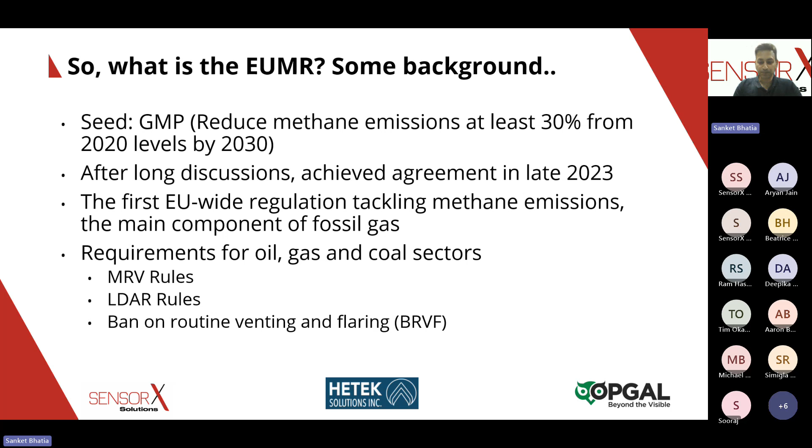And then there's one more part which basically bans routine venting and flaring of natural gas or any gas that contains methane in a high quantity. So there's that part as well. All right, so yeah, that was the background, how it started.

To take this topic away, of course, if you have a regulation like this at such a large scale, you can never make everybody happy. So yeah, there is of course some justified and maybe some unjustified criticism of the regulation as well.

Just a few points here. There is no implication for imported energy sources. Europe itself doesn't have much upstream sources, so there's not a lot of gas being mined here. Europe relies a lot on imported gas, and there is no implication for imported gas yet.

So this is kind of foreseen in the regulation, and this is already now a big topic with Trump and the US, where there's a big pushback. But yeah, this is not something covered in the regulation today. There is no timeline to implement a maximum methane leakage rate, so there is no ceiling defined so far, which brings me back to the point I mentioned earlier. There's no real connection to how much reduction we are hoping to achieve through this complicated regulation.

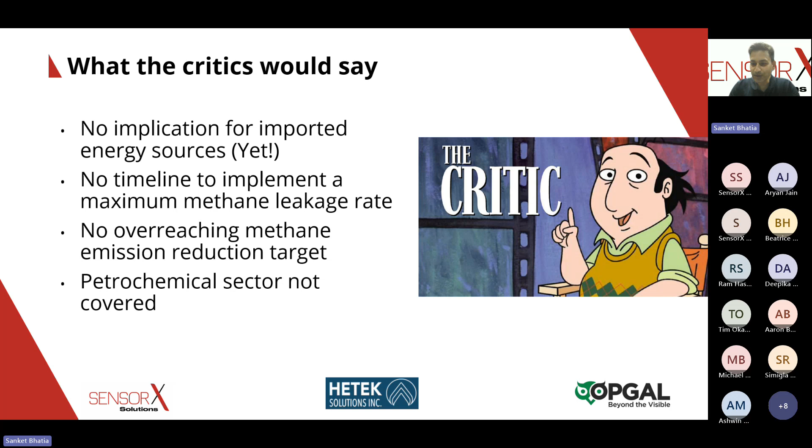So that's the third point as well, no overreaching methane emission reduction target. And then one big sector which is not covered is the petrochemical sector, so really the oil and fossil fuel sector, other than the natural gas part of it. This is all not covered, which is also a big emitter of methane. Those are just a few critical points that are raised often.

Right, so let's discuss a little bit what are the exact requirements. What is the regulation asking for?

So yeah, I said before there are these two parts. There's the MRV part, the reporting part. What we are still waiting on are some of the implementation acts. So the regulation has been adopted and passed, but then on national levels, by each of the competent authorities, there will be implementation acts implemented in the coming time, which will define, for example, the reporting methodology.

Yeah, so there's a lot of rumor, and there are some things already planned that most people know, but there's no real scope and timeline yet. What has been said in the regulation is, in the meantime, till the methodology is finalized, there's a lot of relation with the OGMP 2.0.

Yeah, so this is the other big international framework, which goes back to that GMP I spoke about before. In the meantime, operators have to use the technical guidance documents of the OGMP while reporting methane emissions. What is said in the regulation is, in case of discrepancies between the regulation and OGMP, operators need to notify the competent authority and undertake a reconciliation process. So this is already defined in the EU Methane Regulation.

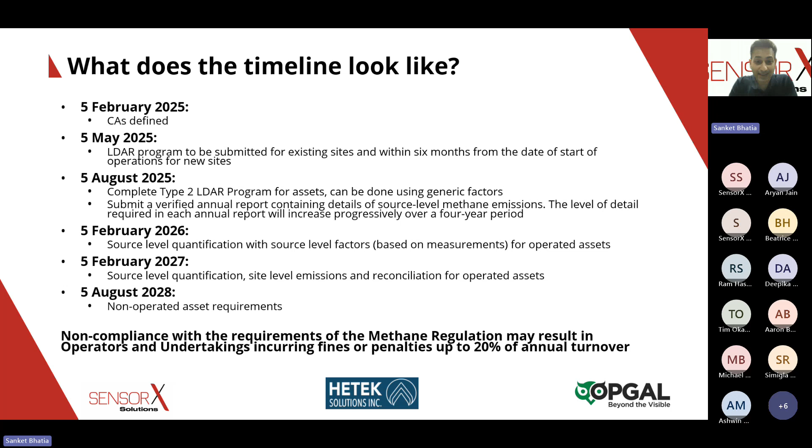Maybe a short word on penalties. Depending on which faction you listen to, the penalties have been discussed as to whether they're high enough, especially when we compare to the penalties defined in the US a couple years ago through the Inflation Reduction Act. Some people said the EU isn't that stringent, but it is pretty stringent actually, in my opinion - there are defined penalties of up to 20% of annual turnover, a huge fine operators can incur if they don't comply with the regulation.

That's a quick run through of requirements. Now maybe a few words on what's being discussed out there. There are a lot of working committees and things planned. The EU is communicating a few things, but it's still a lot of conjecture and rumors about what's planned.

What we certainly know is the discussion around the import rules. That's an important part of the regulation foreseen in the coming years. But there the tug of war already starts - for example, I mentioned the pushback from the US already happening now. We'll see where it goes, so I don't want to guess here.

What I mentioned before, the implementation acts, will come up pretty soon on national levels, and also on certain topics like defining measurement technologies - which kind of measurement technologies can be used for which kind of surveys, for example. These are hot topics being discussed quite a bit, like the limits of detection of the instruments used to do methane measurements. These are all topics which will become part of the regulation moving forward, as is expected.

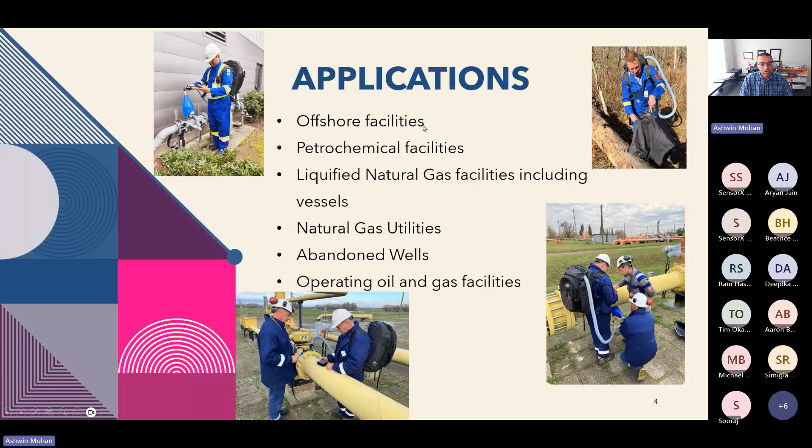Also on the upstream side, abandoned wells and operating oil and gas facilities. These are the different applications in which it's been used, and we have found that it's portable, so for example on the offshore side one can climb ladders, or at a compressor station climb the ladder to the vents and see how much emissions are venting. That's also a key aspect.

Going into some of the future development, where we want to head towards achieving lower threshold limits for performance and design, less than a gram an hour, making sure we have increased accuracy even at those lower limits, and being able to capture a wider range of leak emissions with a smaller dimensional footprint. This is important so that we can have a solution for really low level emissions, and also address safety regulations.

So going for the Type 2 LDAR surveys, which is the EU Methane Regulation, and in America, EPA OOOOb compliance, as well as going for ATEX certification, Class 1 Division 2, making sure we are still designing it in accordance with intrinsic safety in hazardous locations. That would be what's coming out in the future, essentially ensuring we're able to capture a spectrum of emissions in the most accurate and safest way possible.

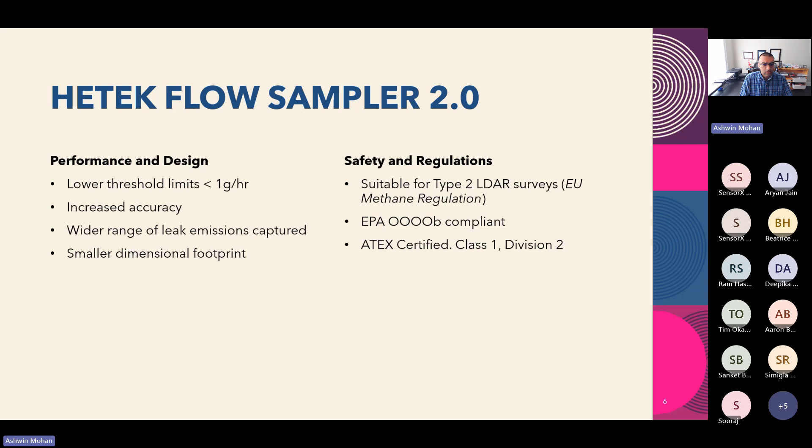And that's it from my end.

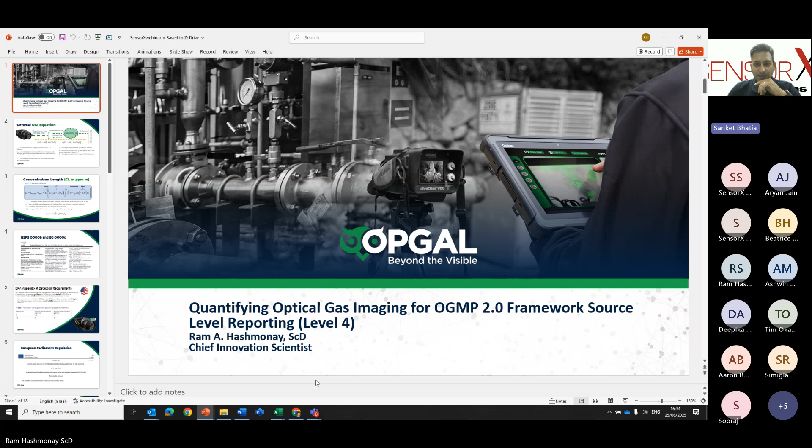Okay, so I will go really fast about the OGI technology, OGI EyeCGas 2.0 or multi-camera, but I'm mainly going to talk about the OGMP reporting framework, measurement-based reporting of methane emissions, which is the level 4 emission inventory, and how we reconcile it with site level measurements, top-down measurements. That's what I'm going to talk about, how to use the quantification in the camera.

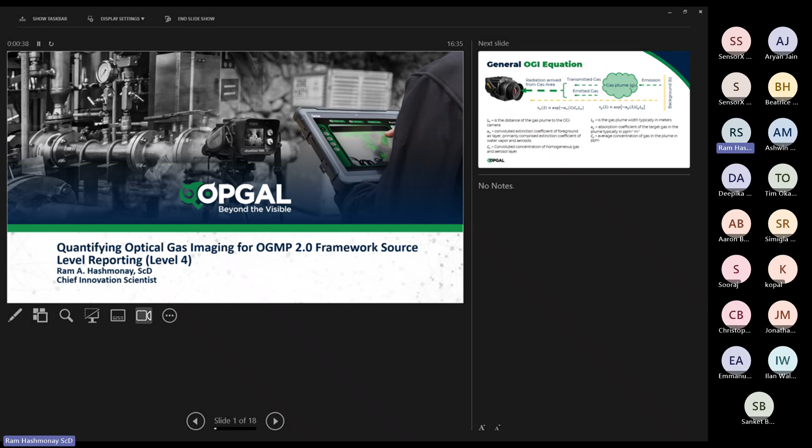OGI camera is a thermal imaging camera that can visualize the gas plume but also quantify it. Leak detection is the part where we can see it at a certain level, and we need to fix it - that's the meaning of leak detection and repair. Under the European regulation, for Type 1 LDAR survey we need to show we can see 17 grams per hour in many conditions, and for Type 2, 5 grams per hour, and 1 gram per hour without camera - I'll talk about that a little bit.

In order to see gases with the OGI camera, we need to have a delta T, a temperature difference between the gas plume and the background. If we don't have a delta T between the gas plume and the background, we will not see the gas. So the higher the delta T, the temperature difference between the gas plume and the background, the more sensitive the camera is.

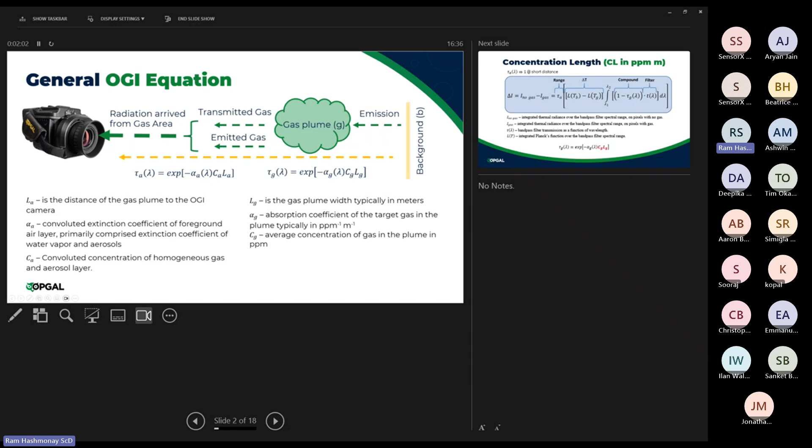Sensitivity is also a function of wind speed and distance. I will try not to go over these equations because we have a very short time slot.

The delta T is measuring the contrast in every pixel of the camera. We see changes between the radiation coming from the background to the camera when you have gas and when you don't have gas, and this difference is a function of delta T and the gas concentration, in a term called concentration length. So we use this information in order to quantify.

The CL is what we are measuring, the contrast normalized by the delta T, and we are trying to extract the CL, the concentration length, in each pixel of the camera, and then convert it to a gas flow or leak rate of the measurement. So there are two parts of it. The sensitivity part of detection really depends on these three conditions: the delta T, the temperature difference, wind speed, and distance.

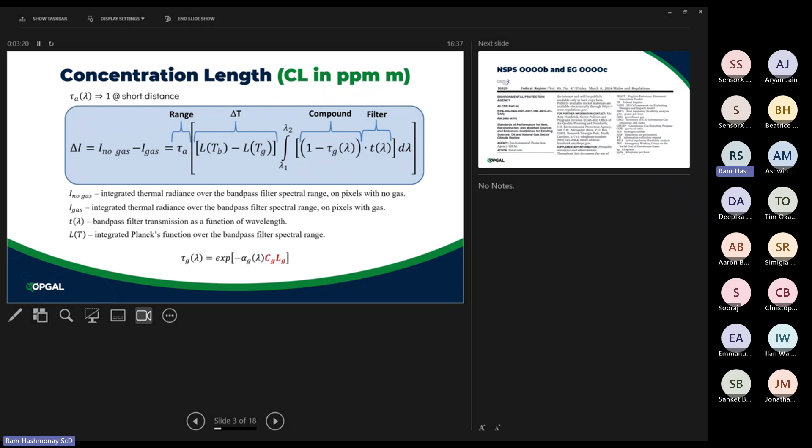We will let you know that Quad B, Quad C in the US, this is the US regulation that came out last year, already defined OGI technology as the method for LDAR survey. They only required the user, the operators, or the manufacturers to define the performance envelope in which you can do an LDAR survey, and they define 19 grams per hour, not 17 grams per hour. Originally it was 19, and then Europe copied it from the US and changed it to 17 for some reason. But 19 grams per hour, what are the set of environmental distance and wind conditions that you can measure? You can do your LDAR survey and still see these 19 grams per hour.

So this is the envelope of performance, and OPGAL has defined two distances, 3 meters from the leak and 12 meters from the leak, and two temperature differences between the background and the gas plume. One is very close to ambient, smaller than 2 centigrade, and the other is if you have a sky background, you can have a larger delta T, so you can allow yourself a wider, more extensive performance envelope.

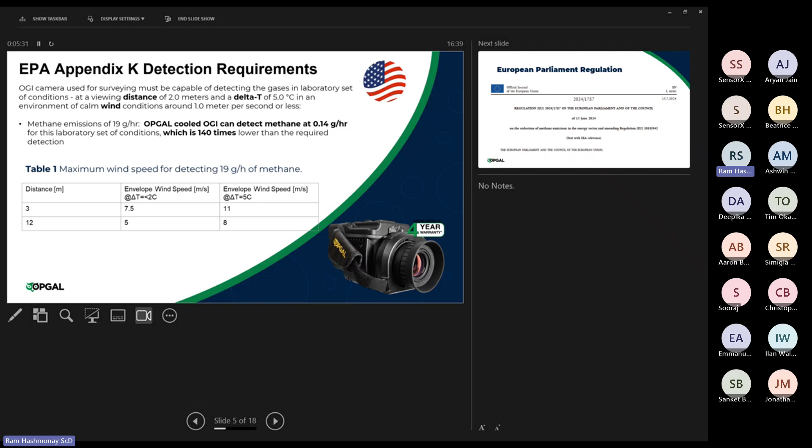So this is in the US. You all know this European regulation, and that's what I want to talk about right now. The European regulation defined two types of LDAR survey, as mentioned before. Type 1, which is the 17 grams per hour limit. I'm sorry, I need to go back. We treated the OGI for using this for type 1 LDAR survey. We also defined the two distances and what kind of wind speed we can still go out and measure.

We can measure 17 grams per hour at 7 meters per second when we don't have delta T. If we look at a sky background or a hotter, warmer background, we can even go to much larger wind speed and still see the 17 grams per hour for the LDAR survey. You see it, that means you have to fix it. Our sensitivity is defined by this performance envelope.

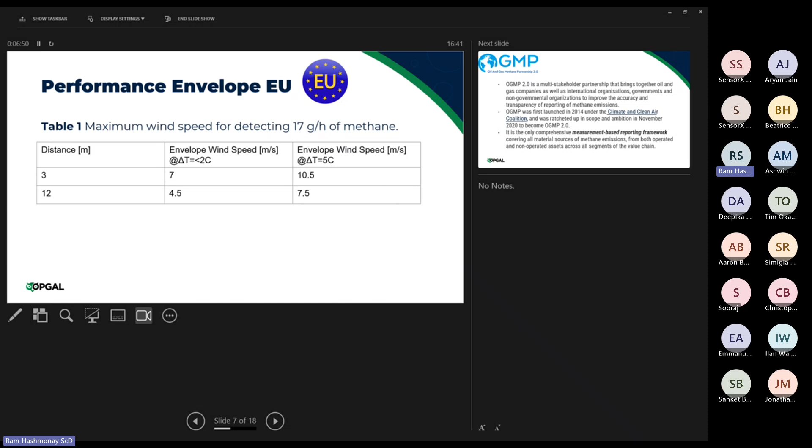We have documents for the 5 gram per hour and for the 1 gram per hour for type 2 LDAR survey under the European LDAR program. The MRV, the monitoring, reporting, and verification program, we are following the OGMP, and we have participated in the GERG, the European Gas Research Group, studies, two-phase studies. One was the blind study, and the other one was a reconciliation study between source level, level 4 reporting, to site level, level 5. Site level is actually not just site level measurement, it's reconciliation of your source level with the site level, and only after you reconcile the two measurements can you report the site level.

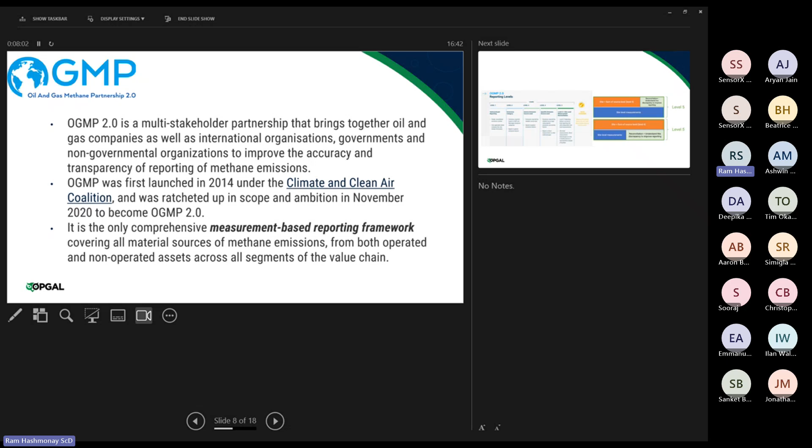So it's a comfort. I highlighted here the measurement-based reporting framework. This is the level 4 emission inventory, which is the source level - what Ashwin said, point source, leak quantification - and the site level is the level 5 measurement.

You can have gaps, as you can see - these are taken from the manual, from the guidance of the OGMP. You see specific source level, level 4, and level 4 plus site level measurement or reconciliation. That's what defines the level 5. You can have gaps in your level 4 measurements, and you need to define your gaps in order to reconcile the level 4 with the site level.

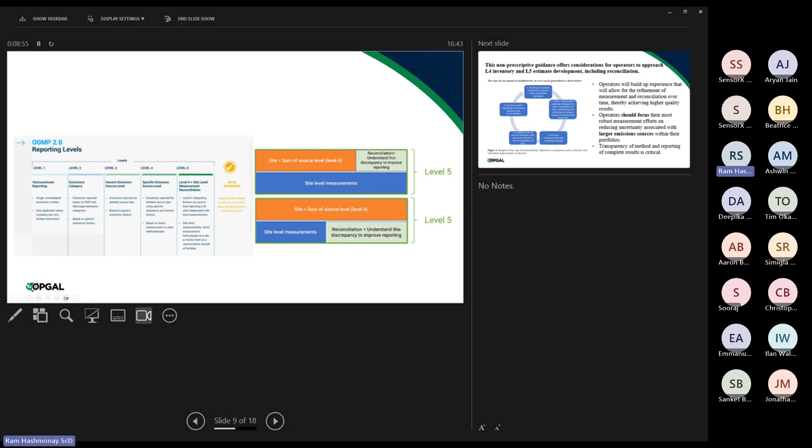But you can also have gaps in your site level measurements, and that's when the sum of all sources that you quantify are larger than your site level. So either way, you need to reconcile, and the process as they define it is like a circular process - you do it every time you do the measurement.

It's a non-prescriptive guidance - the operator can choose the technologies and how to do it. You just need to have it really well described and rigorous, with consideration of the uncertainty and reconciliation between the two types of reporting, the level 4 and level 5. And every year you can refine it and make improvements.

So it's actually the OGMP guidance - it does not tell you which technology to use, and you just need to show reconciliation between the sum of all sources you measured and defined in your inventory of the level 4, with the level 5, which is the site level total emissions.

This is a very important point - the second bullet here, the operator should focus on large emission sources in the level 4. From our experience in compressor stations and other PRMS and other sources in the midstream and upstream, typically in level 4, 80 to 90% of the emissions are not the small leaks close to the ground - it's pretty much the elevated vents that are in kilograms per hour, not grams or 100 grams per hour. So you can cover more than 70% of your site's sources by quantifying these vents accurately.

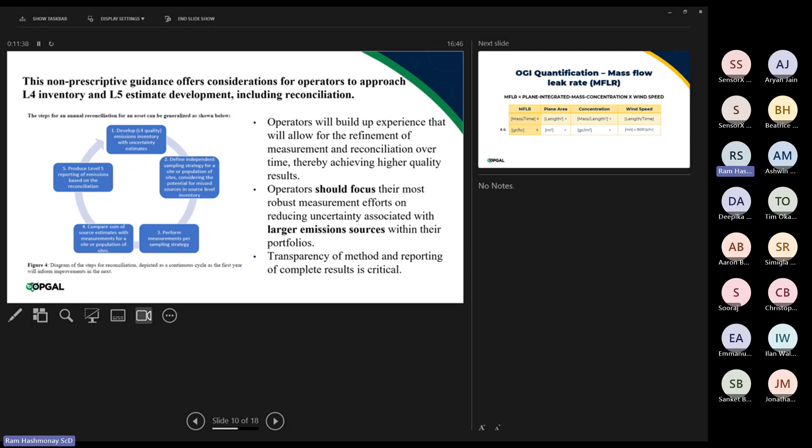What we found out is that probably the best tool for quantifying these remote vents and hard-to-reach vents is the OGI - the quantification QOGI technology. And what I'm going to show you is that our OPGAL quantification software has been shown to do a good job of reconciliation between source level and site level emissions. So we participated in this GERG emissions study - I will go really fast.

Just the basics of what we do: we measure the concentration in pixels, we integrate it over a plane downwind from the source, and we use an algorithm to evaluate the wind speed, and we get a quantification which is a leak rate. It could be grams per hour, kilograms per hour, cubic feet per minute, cubic meter - all kinds of units - but it's a leak rate, a flow rate of the gas that we can quantify with the OGI technology.

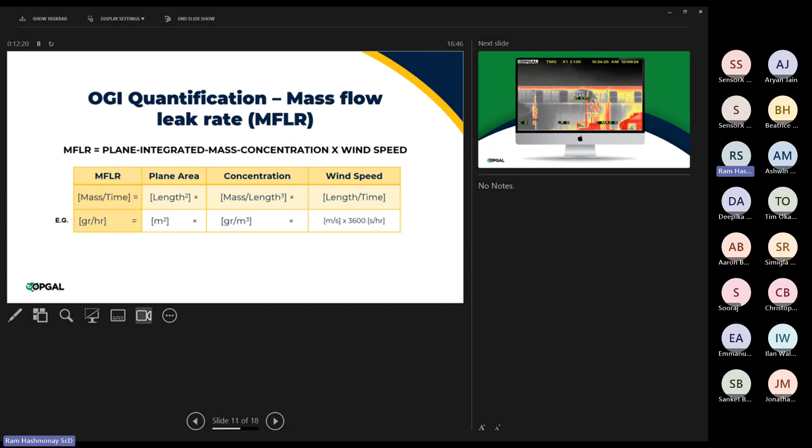We can evaluate the ppm values, but we can also see the gram per hour - actually kilogram per hour. And we found out that in most sites, these vents are the main methane emitters, not the leaks from small pinholes from the processing area.

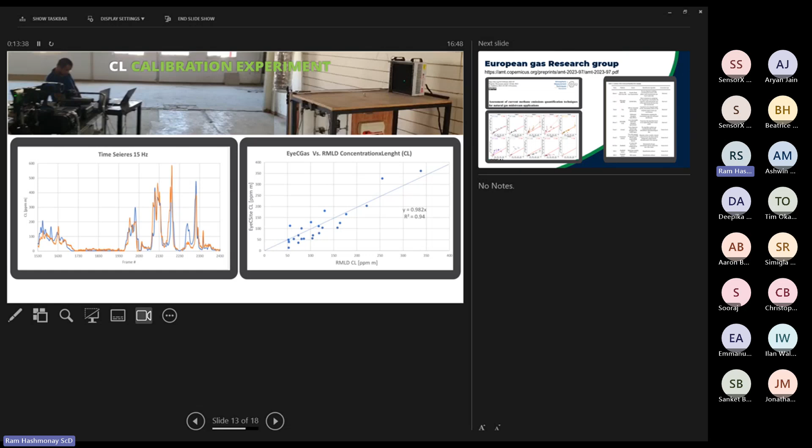So I will move forward. We did some calibration - we compared a tunable diode laser with our 1 pixel to show that we can really measure very accurately the CL, and we participated in 2 phases in the European Gas Research Group.

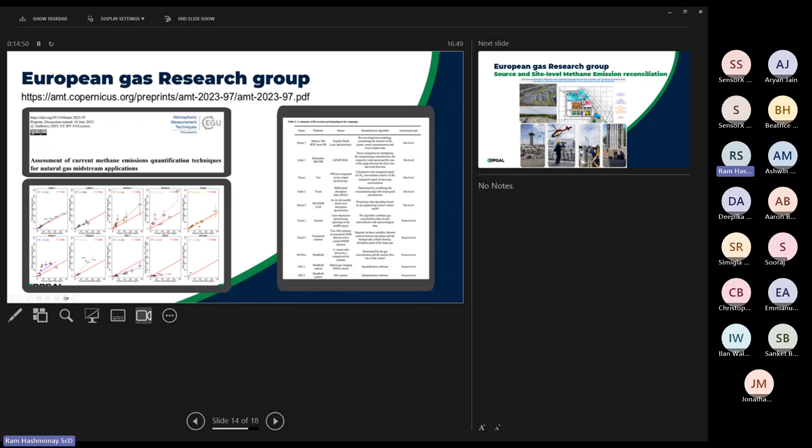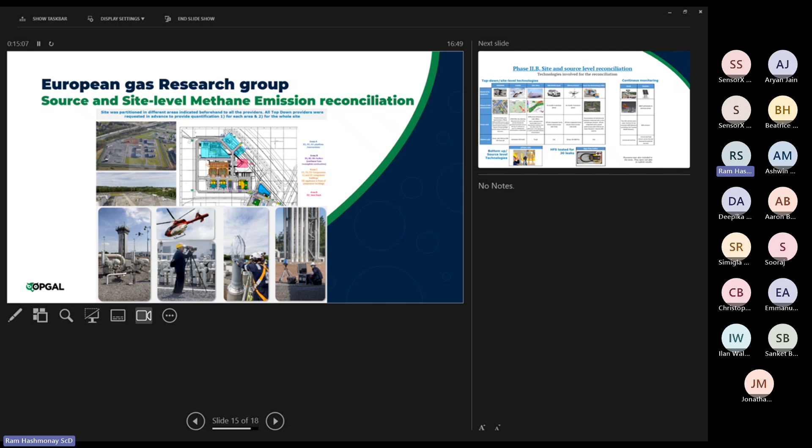The second phase was this source level and site level methane emission reconciliation study. We surveyed for 2 days in 2 modes of operation. Mode 1, the compressor didn't work. Mode 2, it did work. And we did a site survey with a lot of technologies, you can see.

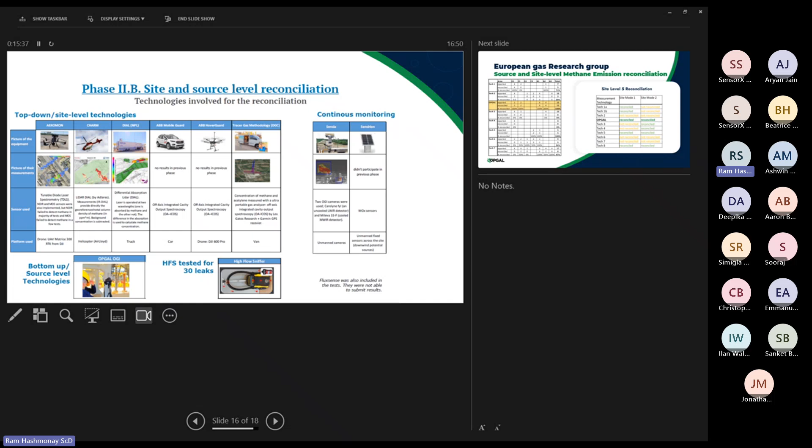But we were selected. We have the Hi Flow sampler and the QOGI. We were representing the QOGI upon our success in the first phase. And all the other technologies were site level, continuous monitoring technologies. My point here is that the Hi Flow sampler can do a good job on close to the ground, small leaks, but when you go to the vents...

I cannot share what are the other technologies. This data belongs to the 15 members of the GERG of this study, and we cannot publish the results. All I can publish is that our results, we reported 12 emissions...

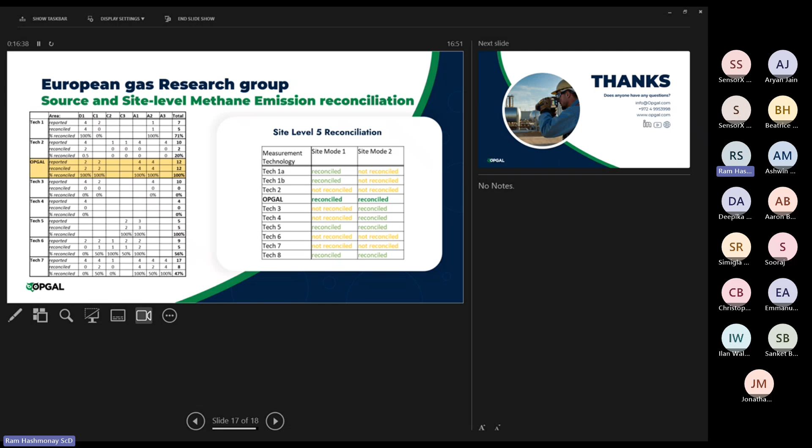and we have 100% reconciliation on the area level. On the site level, in mode 2 and mode 1, we reconciled. So we reported our frequency, our utility of reporting source level and site level was very high, and our reconciliation was 100% reconciliation on the area level and site level reconciliation. The sum of our emissions always reconciled with the site emissions that were known to the operator.

So the final remark that I want to make: the QOGI is very good for remote vents quantification. Our OGI is the best. This is a proven study. As far as the OGMP and the MRV reporting, these vents are the majority of the emissions at any site, because they are in kilograms per hour and not grams per hour. If you do a couple of these vents right, you can pretty much reconcile it for the site level emissions. The other emissions are negligible.

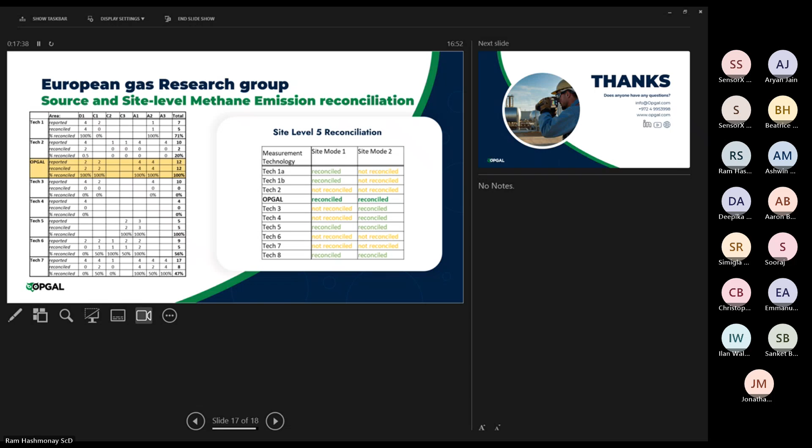So thank you very much, and I hope I was in time.

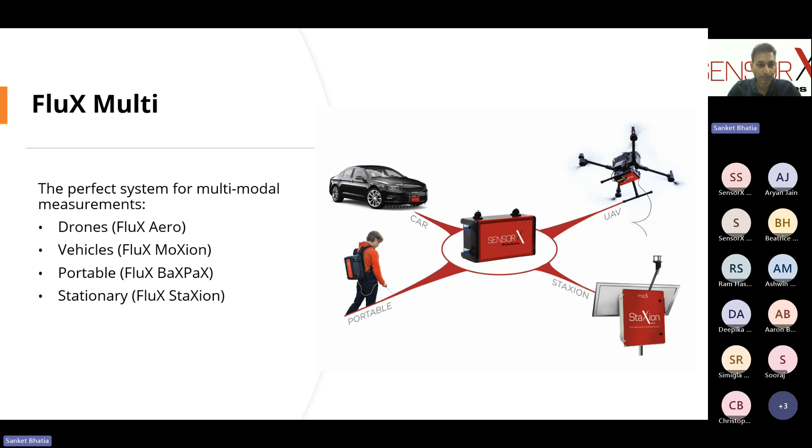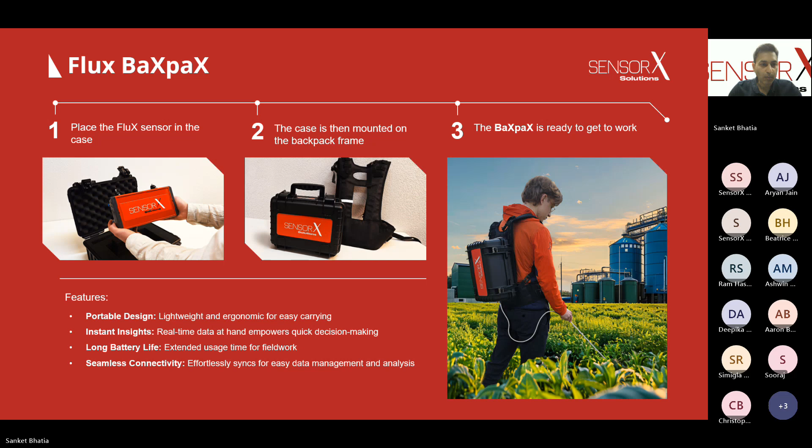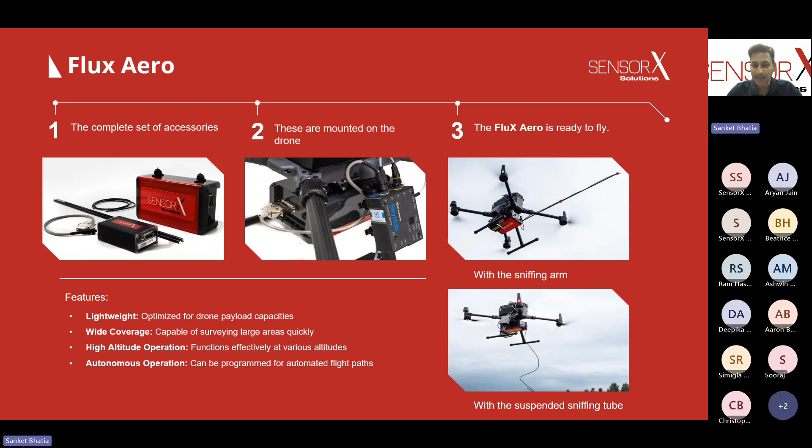I'll just very quickly go through those different use cases. That's the walking survey that can be done with the Flux unit - we call it the Flux BaXpaX mode. Then we have the drone survey mode, we call this the Flux Aero. We have partnered with a company called SPH, which does the onboard computer and the software and so on, so that you can do autonomous flying of drones. You see those two modes that I mentioned before, the sniffing arm and the hanging tube, from the Flux Aero.

The Flux MoXion for vehicle, for driving surveys. This can also be placed inside the car, in the trunk, or in front of the car, for example, and then with sniffers mounted in front of the car, you can do the methane measurement while driving.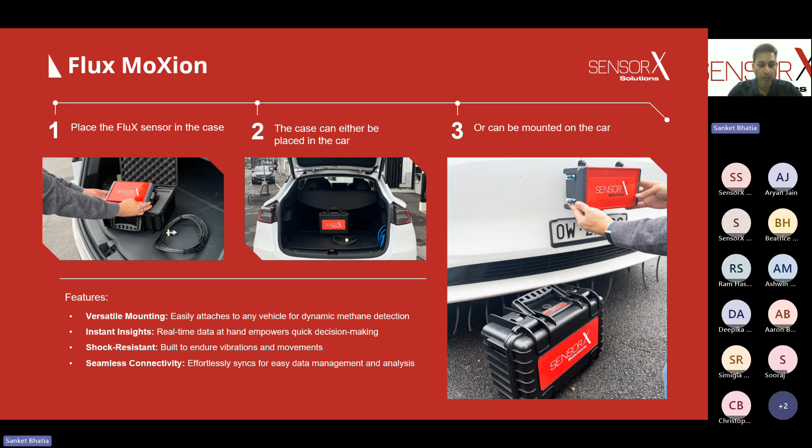The value also comes from the very nice software that does that continuous monitoring. You can set alarms and get a quantified value. We have a very strong simulation of the leak plumes that are created. Based on a very sophisticated dispersion model, we are able to tell you where the leak is coming from and how big the leak is, so the quantified value as well.

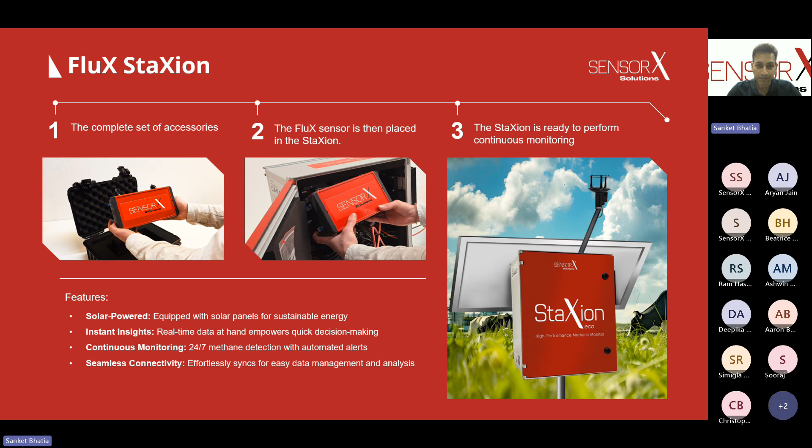So that's the FluX StaXion, and that's the FluX MoXion as a platform. And as I mentioned before, we are also foraying into inspection services.

There we are partnering with HETEC, who's also present on the call here today. We are already providing this to a number of large European operators here in Europe.

I'd like to share a few thoughts from the experiences we've gathered so far. What we have seen is operators, of course, are investing a lot in understanding what the regulation means for them, for implementing measures that will make them compliant. However, operators are very happy if they get end-to-end inspection services. So as a solution provider, there's a good room for solution providers in Europe because of the regulation now.

Of course, there are a lot of great technologies and products out there which can be used for specific purposes. We saw a couple today. Each technology, each product has its strengths and weaknesses, and has a good fit for certain use cases. But operators are very happy if they get a complete solution, because the whole landscape is a bit complicated.

The importance of cutting edge technology is not to be undervalued. For example, we really pick out the best technologies out there when we provide the service, whether this is coming from our own portfolio like the FluX MoXion or other manufacturers. So we use the AMLD vehicle-based system, the Discover system from Heath in the US, for example, for our driving surveys. We use our backpack sniffers for the walking surveys. We use the HETEC high flow sampler for source level quantification, the Opgal OGI for visualization and quantification, and many, many more excellent technologies as well.